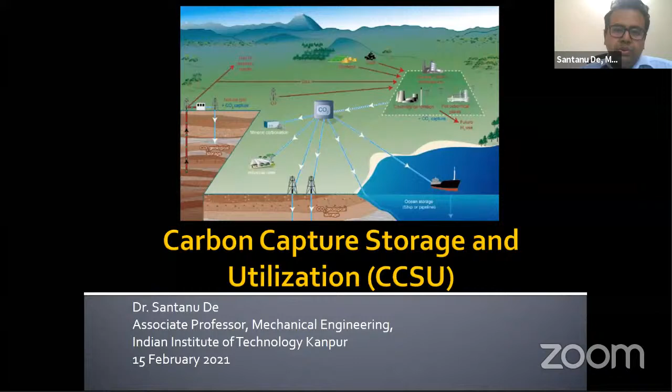If you see my profile, I have not published any journal article on this topic. There are some ongoing works which I can discuss towards the end of this lecture. So just to begin, I will start with my brief background and research interests.

Although the Professor has already mentioned that, some of you can visit my website at IIT Kanpur for more ideas. Basically, I worked on the modeling of turbulent combustion, utilizing various models like RANS and large eddy simulation. We also developed different models for turbulent combustion, like the flamelet model, conditional moment closure method, multiple mapping conditioning, and the transported PDF approach.

If you go from the flamelet to the PDF approach, these are in increasing order of complexity. Of course that's not the topic of this talk, but if anyone is interested you can approach me and we can collaborate or work together. In the past I applied this RANS-based MMC approach, and then LES on different gaseous and spray flames, and burners like piloted stabilized burners, lifted flames, etc.

I also worked on a very interesting project funded by ISRO, on the development of an LES-based model for scramjet combustion - the supersonic combustion of gaseous and liquid fuels. That was also quite a learning experience for me. Here basically the stabilization of the flame when the underlying flow is very much supersonic is very difficult, and we try to predict such complex turbulence-chemistry interactions in supersonic flows.

Some results from my PhD students - I will not go into the details, but we have simulated some burners like lifted jet diffusion flames, etc., and compared our results with experimental models, getting very good agreement. These are the new models which we developed, and we have investigated such flames.

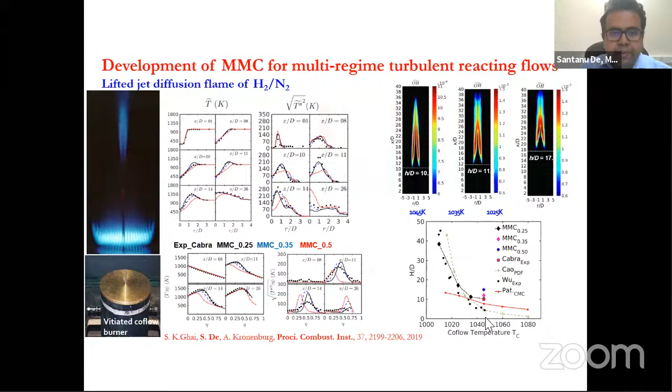This is basically the experimental picture, and whatever we have plotted is our results, with symbols representing experiments. We can see the variation of the lift-off height under different conditions, and a very good trend predicted by our model. This is another example of experimental and numerical validation - I will not go into much detail, but if you're interested we can discuss it later, or you can contact me by email and we'll be happy to share information.

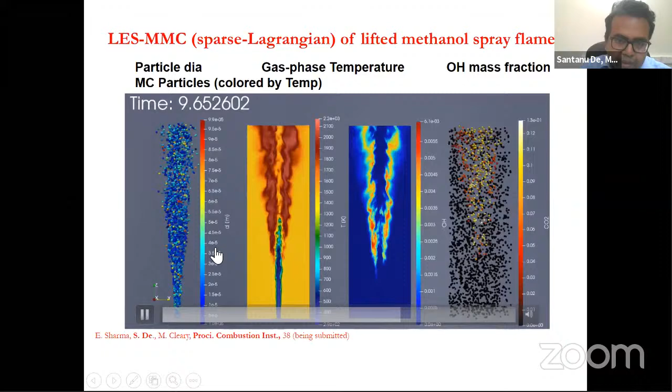Now this is the large eddy simulation - some of you may be working on this, or planning to. We can basically predict very complex flames, and you can see the flame changing instantaneously. This is the instantaneous temperature field, and the flame is basically a lifted flame stabilized away from the burner. Here you have a jet with liquid particles, which are coming along with the flow, and they will evaporate and then participate in combustion.

And this is your OH contour, and you can again see that much of the combustion activity is happening around this location, and so on.

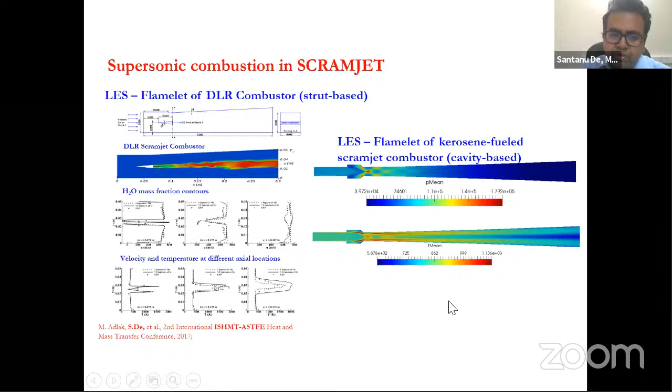This is the DLR scramjet combustor, like a supersonic combustion in scramjet engine. We have done some validations here for the DLR scramjet combustor with our own models, and we got a very good match with experiment. On the left side is the DLR combustor, and on the right hand side we have another combustor where liquid fuel is used. In the DLR combustor, hydrogen is used as fuel, and here we are using kerosene as fuel. In both cases, we've done a validation work.

So this is the coal gasifier, the schematics of the coal gasifier that we have developed. Here we have a gasifier, and coal is being fed, and the bed is fluidized by fluidizing media, which is basically steam or a mixture of steam and air. And on the left hand side we have a riser where this is the combustor.

So why is it called dual fluidized bed? Because these two beds are interconnected, and the bed materials like sand and coal that we are feeding will come from this loop seal, and it will enter the riser. In the riser we burn the fuel, basically the coal, and it generates a high temperature gas that will heat up the bed materials, and these bed materials will be segregated by the cyclone, and then come to the loop seal, and then return to the bubbling bed.

So basically the bed material goes a path like this, and it carries the heat from the riser or combustor to the gasifier, because in the gasifier you are providing steam, and doing gasification reactions which are endothermic in nature. So therefore you need to circulate the heat generated by burning one part of the fuel, and through the bed materials it is done.

Okay, so that is the concept, and this gasifier is suitable for the coal that we have in India, which has a large ash content as high as 45% in those coal samples, and it has a fixed carbon content which is about 40%, and very less volatile matter.

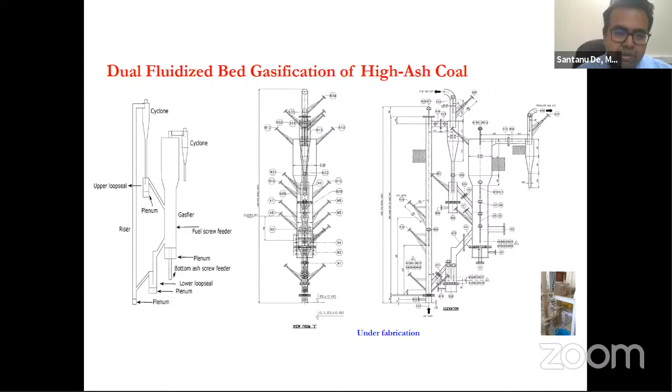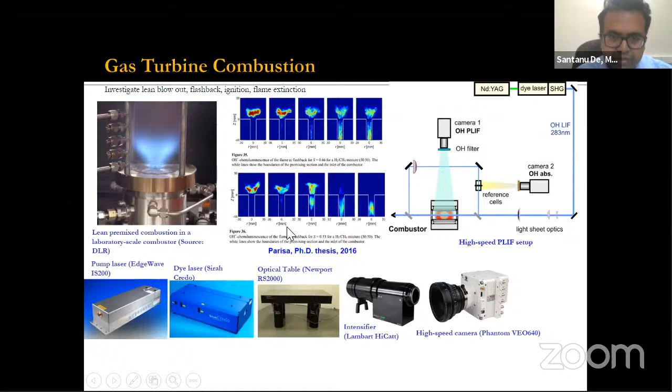Okay, so coming to today's talk, the contents basically covered will be the trends and impact of CO2 emission on Earth, and then the carbon capture technologies that we have. We will briefly talk about the methods for CO2 separation, and then we'll talk about CO2 utilization. So you can note down your answer, or ask during the presentation, or ask me towards the end of this topic.

Okay, so as we know we need energy for sustaining our day-to-day activities, and there are various sources of energy right now that we have. So the message is that all sources of energy will continue to be valid and necessary, and we need to go for a mix of energy. That is the demand of our situation. As of now, we are using fossil fuels, and the share of renewable energy is continually going on the higher side, but still the use of fossil fuel is inevitable, and it will continue to be used. So then what is, how can we mitigate the harmful effect of the fossil fuels?

The problem is that we can try to capture the CO2 and use it for some downstream applications, or we can compress the CO2 and store it underground for long periods in geological reservoirs. We'll discuss some of these things in this presentation. Environmentally, this has to be sustainable—whatever energy source you are using should be environmentally sustainable and adopted across all sources of energy.

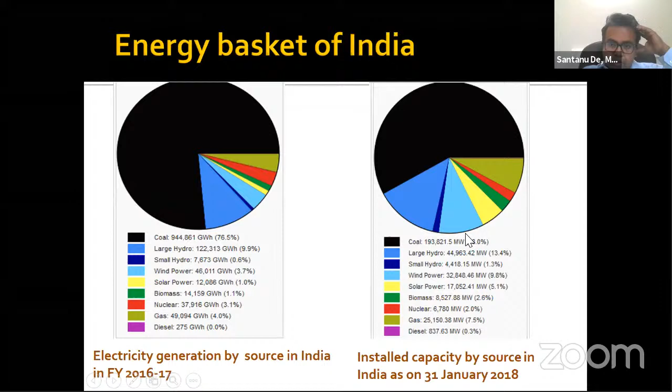Installed capacity by source in India as on 31st January: coal is about 58%. These are basically the electricity generated and the installed capacity figures. You can see large hydro, small hydro, all these things here. The installed capacity is 58% for coal.

Now, carbon capture, sequestration, and utilization. This is probably one of the best solutions to mitigate global warming issues, as per the IPCC's prediction that the rise in temperature should be within 1.5 to 2 degrees centigrade. That is the prediction given by the IPCC, and we need to stay well within this limit. We'll also see the effect of CO2 emission on various ecological things.

There are different sources which are emitting carbon dioxide, and this CO2 has to somehow be captured. From this CO2 that we capture, we can make chemicals and fuels—this is basically called CO2 to X, where X could be fuel, fertilizer, or any other chemical.

Another part is that we need to do carbon mineralization technology—basically mineral carbonates can be produced.

Another thing is that we can store this carbon dioxide in geological storage, basically for enhanced oil recovery. We can pressurize this CO2 and put it under the oil reservoirs, and we can mine oil that was otherwise not mineable. This is another area that can be pursued using the carbon dioxide emitted from different power generation utilities, so we can recover some of the oil.

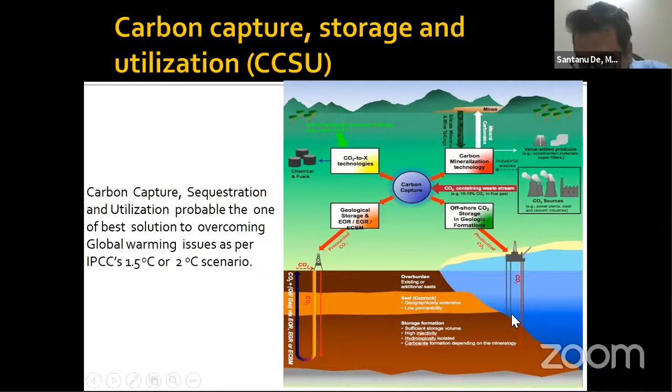Another approach is offshore CO2 storage in geological formations. Basically, on an offshore rig, you drill a well and put the CO2 under the seabed. That is another way to mitigate CO2 emission to the environment.

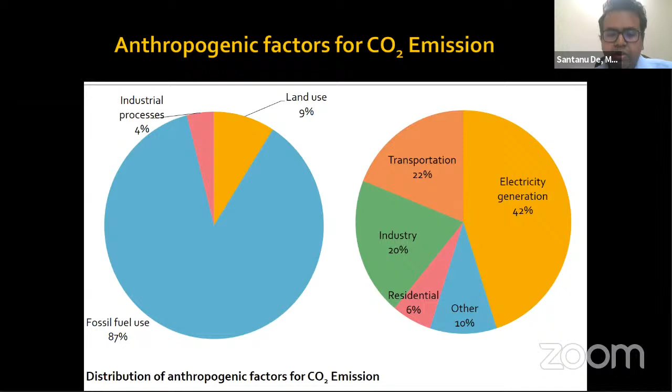Now, the anthropogenic factors for CO2 emissions are outlined here. Use of fossil fuel is about 87%, along with industrial processes and land use. For the transportation sector, there is about 22% CO2 emission. For electricity generation, it is about 42%. Industry is about 20%, residential is 6%, and any other factor is about 10%. This is the typical distribution of CO2 emission from various sectors and industries.

Now, the consequences of CO2 emission—these are basically listed here.

Increased concentration of CO2 in carbon sinks leads to global warming, which can affect the change in food supplies. It can cause extreme weather calamities, and the global average surface temperature rises by more than 1 degree centigrade, along with poor human health and rising sea levels. So these are some of the bad effects of global warming.

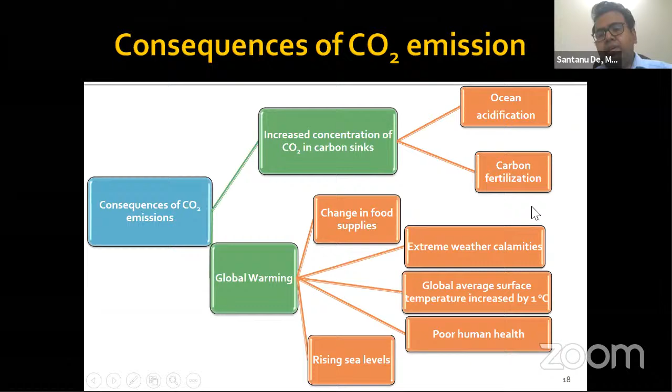Increased concentration of CO2 in carbon sinks can also lead to acidification of the oceans and carbon fertilization. So these are some of the harmful consequences of CO2 emission.

Now, if you look at what we are all hearing in the news and other articles, the glaciers are melting. In fact, a few days back in Uttarakhand, there was a glacier related incident.

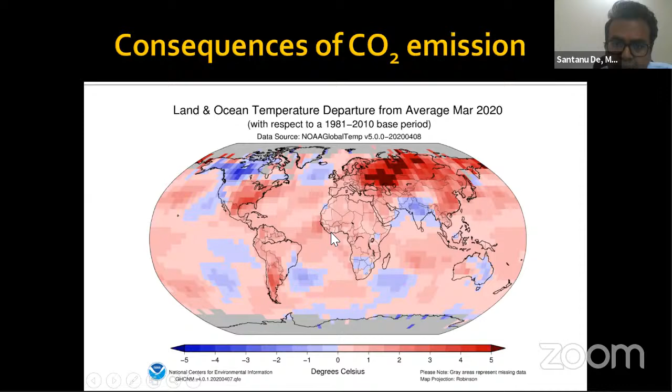Here you can see the annual global surface temperature change for both land and ocean. It is seen that recently there is a steep increase in the annual change in global surface temperature for both land and ocean. So these are some of the data that point out the harmful consequences of CO2.

The average CO2 concentration in the atmosphere is increasing at an alarming rate since the beginning of the industrial age, and in 2016 it reached and went past 400 ppm. Future trends predict that CO2 concentration will continue to rise because of our dependence on fossil fuels as the primary energy source. So now we need to think about renewable energy sources, and at the same time, if we are using fossil fuels, we should try to use them in a better manner, meaning we should use more energy efficient systems and go for hybridization.

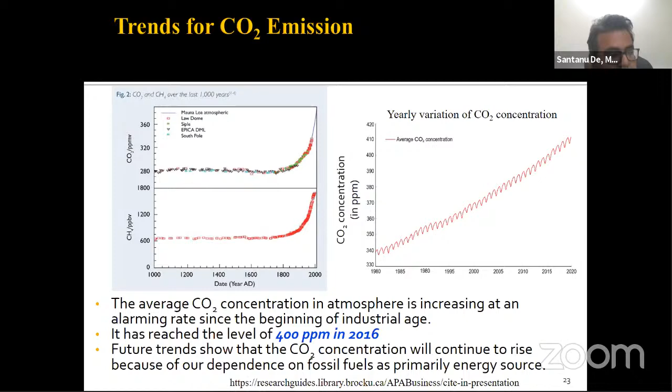So we need to attack this problem in several ways. One is that we need better efficiency power generation systems. We should go for hybridization, and at the same time try to evolve our research towards capturing some of the CO2 being emitted to the atmosphere. We should use some of this CO2 to make fuels and fertilizers, and we can store this CO2 in geological reservoirs. That should be our approach, and I will try to talk about some of these things in this talk.

The average global temperatures have risen 0.75 degrees centigrade in the past 100 years, that is about three quarters of a degree centigrade. Now, can anyone tell how much it will rise in the next 100 years?

Let us see the prediction for rise in temperature. If that happens, it will be a catastrophe for the world, for human civilization, and for all the animals and the ecology.

Therefore we need to be very careful in our consumption, and we should try to go towards better energy systems and mitigate the CO2 emission to a large extent.

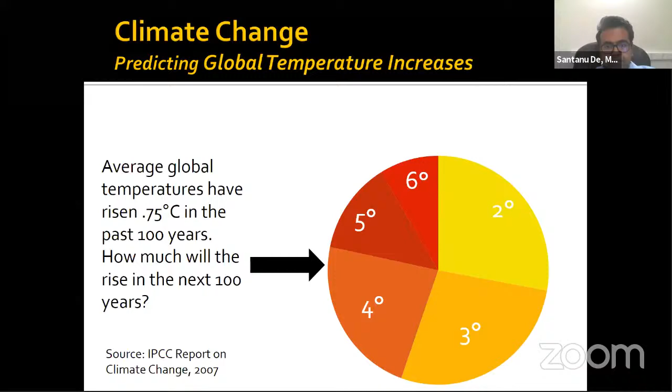The predicted impact, as we have seen, is a temperature rise of about 4 degrees. Now, what will be the impact on us? Let us see.

At 1 degree centigrade, we see severe impacts in marginal Sahel region, and rising crop yields in high latitude developed countries if there is strong carbon fertilization. In water systems, small mountain glaciers will disappear worldwide, with potential threats to water supplies in several areas. At 2 to 3 degrees and 4 to 5 degrees centigrade, further impacts are listed.

There is a rising number of people at risk from hunger, about 25 to 60% increase by the 2080s in one study with weak carbon fertilization, with half the increase in Africa and West Asia. There are significant changes in water availability; one study projects more than 1 billion people will suffer water shortages in the 2080s, many in Africa, while a similar number will gain water. There will be a greater than 30% decrease in runoff in the Mediterranean and Southern Africa.

At about 4 degrees, entire regions experience major declines in crop yields; yields in many developed regions will decline even with strong carbon fertilization. Sea level will rise, threatening many world cities including London, Shanghai, New York, Tokyo, and Hong Kong. These are the predicted impacts if temperature rises about 4 degrees and higher. This is from data on the economics of climate change, from 2006, which is quite old, but gives us some of the ideas.

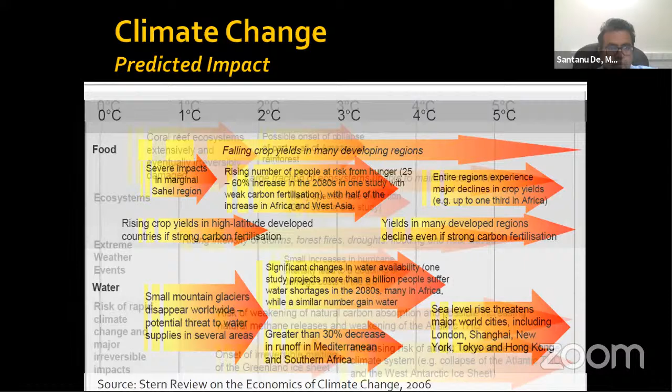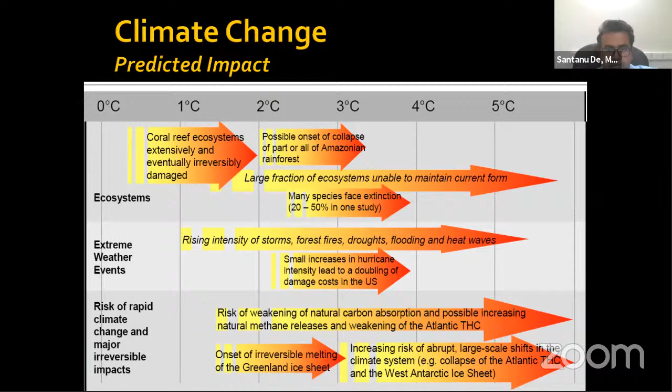What will happen in the ecosystems? Many species will face extinction. There will be extreme weather events: rising intensity of storms, forest fires, droughts, floods, and heat waves. A small increase in hurricane intensity will lead to a doubling of damage costs in the US and in other countries. There is risk of rapid climate change and major irreversible impacts, including weakening of natural carbon absorption, possible increasing natural methane releases, weakening of the Atlantic thermohaline circulation, and onset of irreversible melting of the Greenland ice sheet.

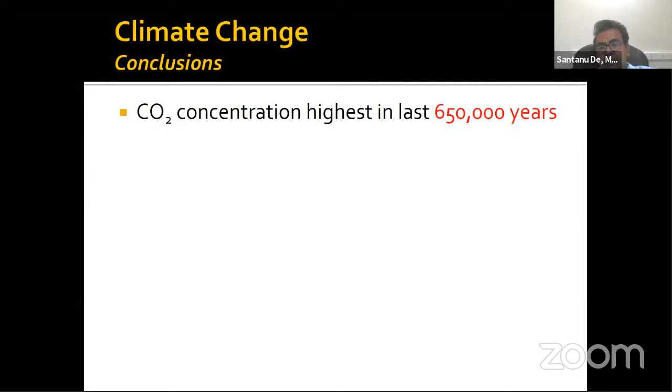The conclusion of the climate change is that CO2 concentration is the highest in many years. Warming of the climate system is unequivocal. Most of the global warming of the past half century is due to the increase in greenhouse gases.

Like so CO2 is a greenhouse gas, and so is methane, right? Global greenhouse gas emissions reduction challenge.

We have to stabilize CO2 concentrations at 450 ppm. Now we are already at about 410 ppm. So in order to have a temperature rise limited to 2 to 2.4 degrees centigrade, we should limit CO2 concentration at 450 ppm, with peak CO2 concentration before 2015, and reduce emissions to 50 to 85% of 2000 emissions. Whatever CO2 is emitted at 2000, we have to reduce CO2 emissions to 50% to 85% of that by 2050. So we have a tall task, and governments across the globe are working towards that.

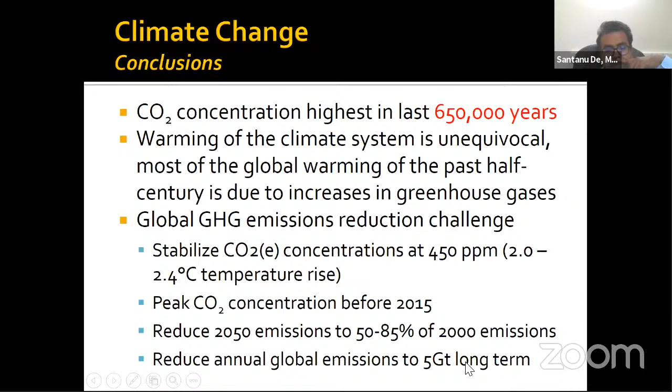Here in India also, we have done a lot to mitigate CO2 emission. We need to reduce annual global emissions to 5 gigaton in the long term. So these are the targets that we have to meet.

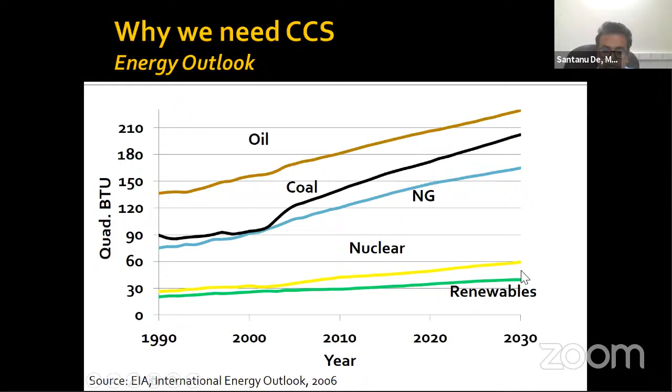The use of coal is still rising, oil is rising, natural gas is rising. Renewables have risen, but it is far less than these other sources.

Then there's conservation and energy efficiency - if we use higher efficiency energy systems, or even LED bulbs which we are all using now, we have to find better energy systems and conserve electricity by going for high electrical rating equipment and devices. Then we can again save a lot of CO2 emissions. So these are the ways we can mitigate CO2 emission to the atmosphere.

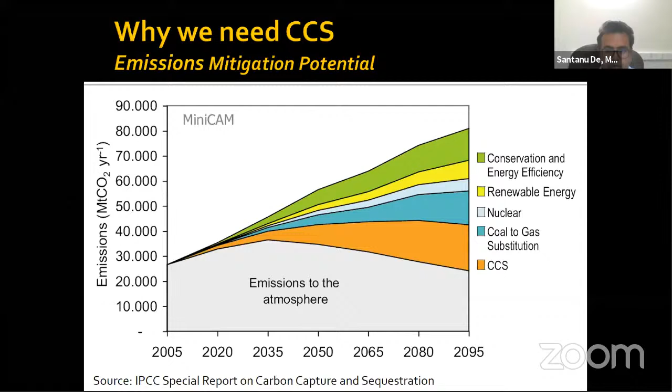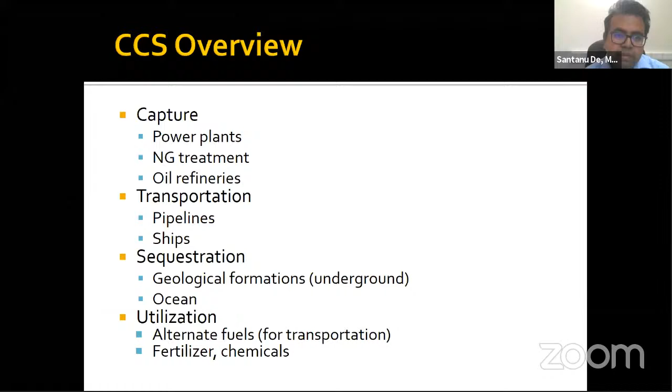Now, what are the growth drivers? The burgeoning demand for CO2 for enhanced oil recovery techniques - as I said, some US-based companies, or even in Norway, some companies are getting this CO2 and putting it under the oil well for enhanced oil recovery. They're using the North Sea in Europe. In the North Sea, I think Norway has developed a rig where they are basically doing this CO2-based enhanced oil recovery.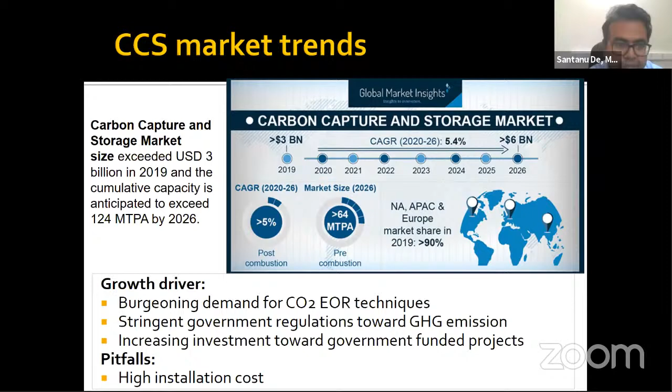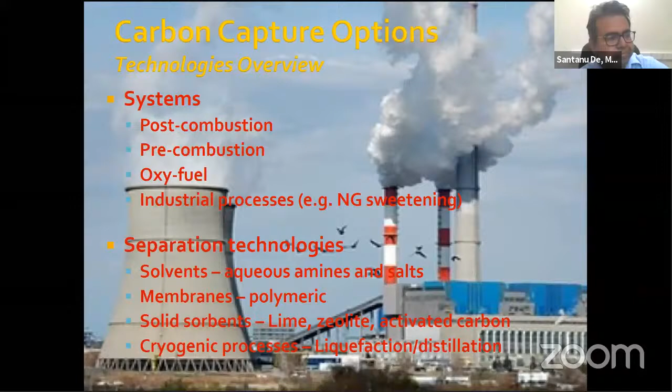So post-combustion capture is where you basically use the fossil fuel, which could be coal, gas, or even biomass, which is a renewable fuel. You burn this in air to produce heat, and then run a turbine to produce power. The flue gases then need to have nitrogen and oxygen separated, since most of the time we give surplus oxygen in the boiler, and then you can separate CO2.

Air has 79% nitrogen by volume, so you need to remove a large amount of nitrogen and some oxygen from the flue gas, which is not an easy task. There are techniques that can be employed to remove CO2, but the problem is that those separation reactors become very bulky because you have to deal with a large volume of flue gas.

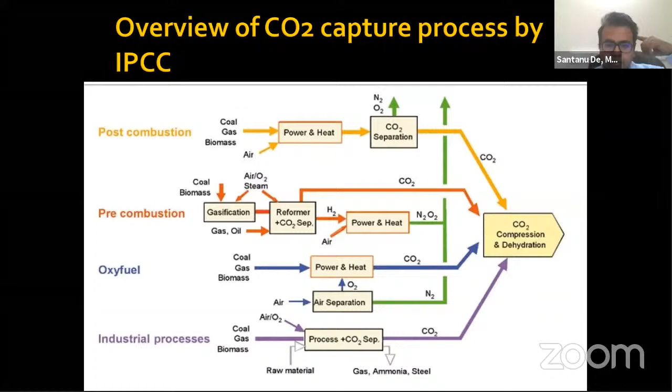This is a schematic diagram of post-combustion capture, where fuel and air are used to burn, and the heat generated is used to produce power, and you have to separate the carbon dioxide from the other gases. So this is post-combustion capture.

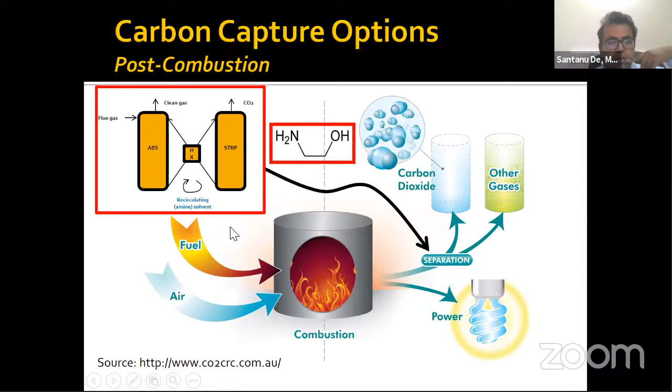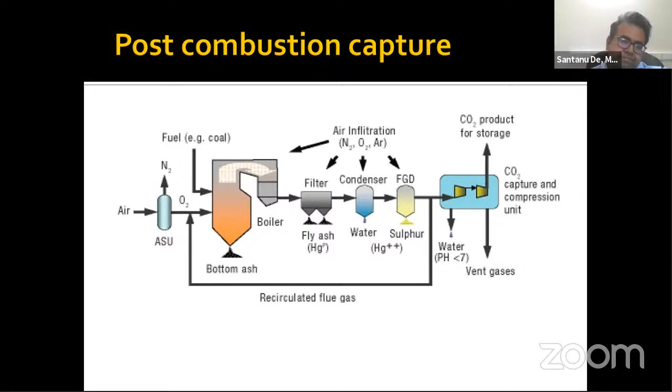Yes, so we all know about this pulverized coal plant, right? Here you are capturing the CO2 after combustion, so this is post-combustion CO2 capture. We have the pulverized coal boiler where you supply coal and air, and then you have the ESPs and the FGDs, etc. After that, the CO2 capture system is placed where you separate the CO2 based on amine-based separation, as I discussed previously.

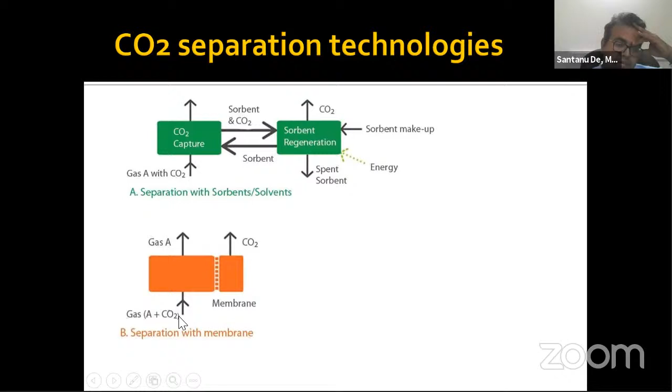Another CO2 separation technology is based on membranes. Here we have a gas with CO2, and based on the membrane, it can separate CO2, and you get the flue gas, basically the other parts. So this is the membrane based separation technology.

Solvent-based approaches have been demonstrated quite well over the last couple of decades, and membrane-based separation technology is also coming up. There's a lot of research going on across the world, and this is a promising technology not only to separate CO2, but it can also be useful to separate oxygen from air.

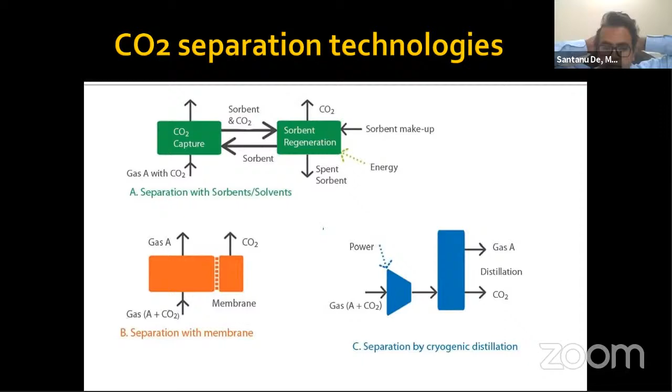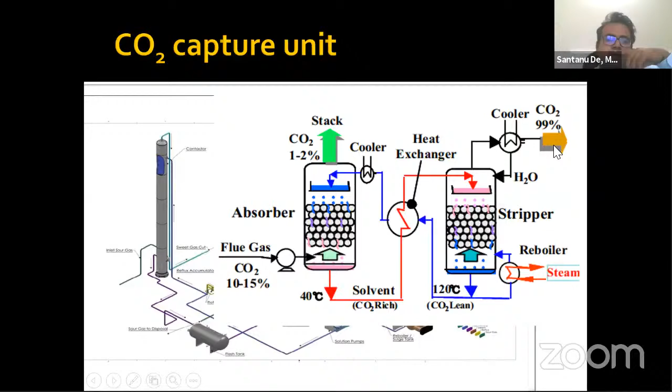The capture cost of CO2 is about 80% of the CCS cost, and the rest 20% accounts for compression, transportation, and sequestration. The solvent regeneration cost accounts for about 60% of the capture cost, so you can see that it is quite high.

The cost of electricity can increase by 70 to 80% based on that MEA. MEA is one of the amines, and based on the MEA, research has shown that electricity cost will rise by 70 to 80% if you want to capture CO2.

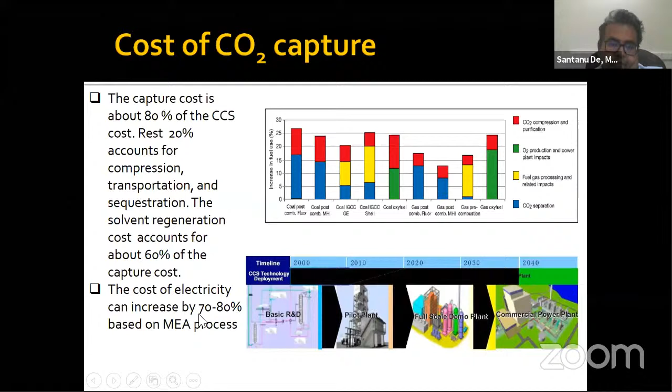Now, CO2 capture technology selection. How do you select the technology? Drivers for process selection include the temperature of the feed gas, presence of oxygen, presence of contaminants like H2S, ammonia, COS, sulfur dioxide, etc. It should be commercially viable, cost effective, and able to be assimilated into existing process configurations.

So we have a power plant, and now if we can retrofit, or develop another system to capture this CO2, that will be good. All these things need to be considered before arriving at a technology.

So possible technology routes could be, as I mentioned, gas separation membranes, absorption membranes, physical absorption, cryogenic separation, adsorption, and chemical or amine based absorption. These are the CO2 capture technologies.

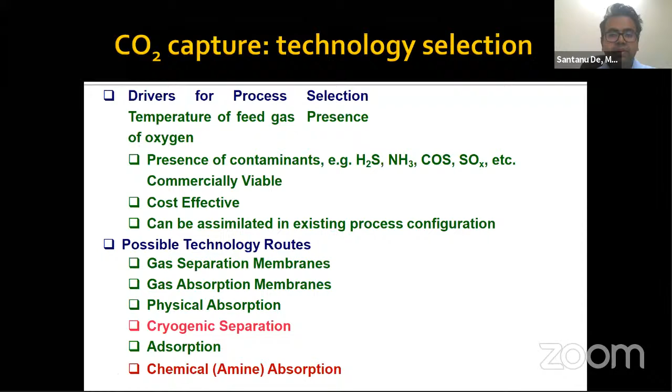Chemical absorption process is extensively used for CO2 removal from flue gas and industrial gases, with a wide choice of amines commercially available, for example MEA, DEA, etc. Some blended amines are also available.

It's a thermodynamically non-ideal system due to electrolytic dissociation of CO2, amine, and water, with poor stage efficiencies in the contactors due to heat of absorption. For effective modeling and engineering design of amine contactors, one needs to look at the thermodynamic interactions.

I will not go into much detail on this, but this is an overview I'm trying to give. These are different kinds of amines that can be used, like monoethanolamine, diglycolamine, diethanolamine, etc. I'm not an expert on this topic, so I won't be able to tell you much more about it.

Now, cost of post-combustion CO2 capture, based on a study done by one US-based agency. You can see the overnight capital cost for different things - one is the ultra supercritical coal power plant, and another is the ultra supercritical coal with 90% CCS. You can see that the capital cost has increased.

Now per megawatt, you can see the capital cost has increased. But if you compare this capital cost with onshore wind and solar PV, it is very high at this moment, because the plant capital cost itself is also very large.

Now, fixed operation and maintenance cost is about 42,100, and here it is 80,530 per megawatt year, which again is much higher than the solar PV and onshore wind applications.

So the total here you can see the CO2 transport and storage cost is basically 9.13 megawatt hour, and that levelized cost has gone up from $92.46 to $151.34. So that means per megawatt hour the cost has increased.

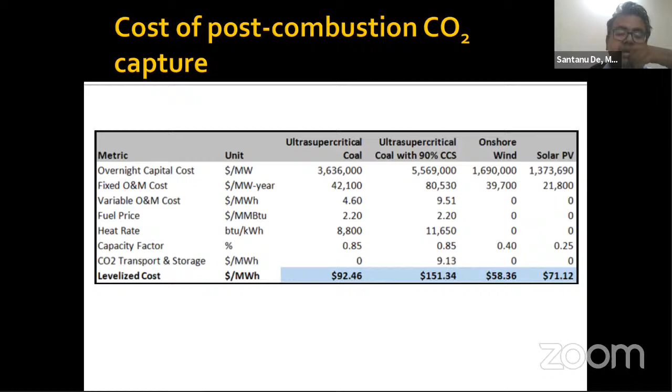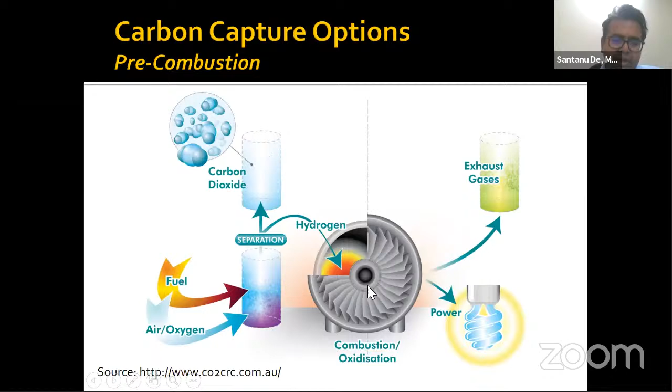I'll skip some of these slides in the interest of time. I already described the oxy-fuel combustion process, so I'll skip this too. The pre-combustion capture I already mentioned some of - it involves the sequestration of CO2 from fossil fuel prior to completion of combustion. So you do not burn the fuel, rather you gasify it, and whatever gases are produced, that is the syngas, before it is burnt, you capture the CO2.

Here is a schematic where you have the gasifier, where you are supplying the fuel and steam, and you may supply oxygen also. Then the syngas will not have any nitrogen dilution because you are not giving air. If you are using a dual fluidized bed gasifier, you can gasify coal in a pure steam media, without needing oxygen or air. But in some gasifiers, to sustain them, you need to produce some heat, because the gasification reactions are endothermic - therefore you need to supply some external heat.

In the dual fluid bed system I initially discussed, heat is circulated via bed materials. But if it's only a single reactor, like a bubbling fluid bed or circulating fluid bed reactor, you need to burn part of the fuel inside the reactor, and if you're using air, your gasification product will have nitrogen - again the same problem of separating large amounts of nitrogen from the syngas. Therefore the dual fluidized bed system is better, because in one reactor I'm gasifying the fuel in presence of steam, and in another reactor I'm burning the coal in presence of air, transferring the heat from one reactor to another. That's the advantage of the dual fluidized bed system, and this syngas will be free of nitrogen.

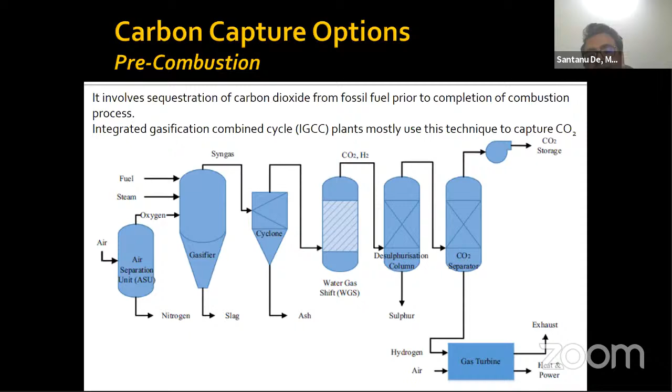After that you can remove the particles, that is the ash, from the cyclone, and then the rest of the gases can be fed to the water gas shift reactor, where you're producing carbon dioxide and hydrogen. Then you have the desulfurization column where you separate sulfur, and then you can capture the CO2 and store it, and the rest of the gases is hydrogen, which can go to the gas turbine. So that is the pre-combustion capture, and by designing the gasifier to prevent nitrogen dilution, you do not need to separate nitrogen - that will be quite good actually.

This is another layout of the pre-combustion capture, where you have the raw syngas produced by gasification, which can be cleaned, and after cleaning, you send the clean syngas to the combustor of a gas turbine, where ambient air is compressed and you burn the fuel to produce high temperature gas. Then you have the turbine to produce electricity, and the heat recovery steam generator which produces steam for a Rankine cycle. So it's a combined cycle plant, like the IGCC plant I was discussing, and you can also separate CO2 from this plant and store it.

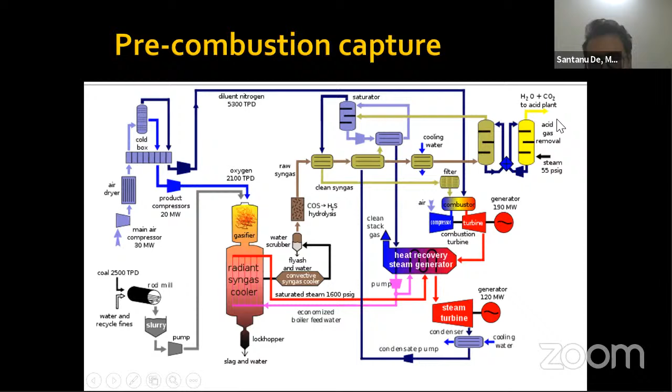Pre-combustion capture comes with advantages, because it generates hydrogen or synthesis gas as an alternative fuel. You can use coal and biomass to produce hydrogen or synthetic gas. It also allows a compact system design due to lower gas volume, higher pressure, and higher carbon dioxide concentration.

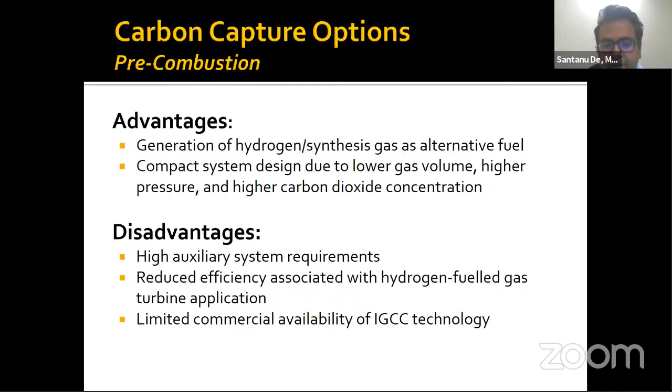But there are problems too. It requires high auxiliary systems, and there is reduced efficiency due to hydrogen fuel gas turbine application. There is also limited commercial availability of IGCC technology, so it is not commercially available yet. In our country, BHEL has developed IGCC and also developed a gasifier, but it is not commercially available. This requires more emphasis on research, and after that I think it will be suitable for commercial applications.

In pre-combustion capture, there are various technologies to separate CO2. One is called the Sulfinol method, where different chemicals are used. Another is the Selexol method and the Rectisol method. These are different ways of capturing CO2 from pre-combustion capture, before you burn the fuel, you have to capture this CO2.

Physical absorption is becoming increasingly popular as a gas treating solvent, especially for coal gasification applications. Physical solvents tend to be favored over chemical solvents when the concentration of acid gases or other impurities is very high. In addition, physical solvents can usually be stripped of impurities by reducing the pressure without the addition of heat. I will skip some of these slides in the interest of time.

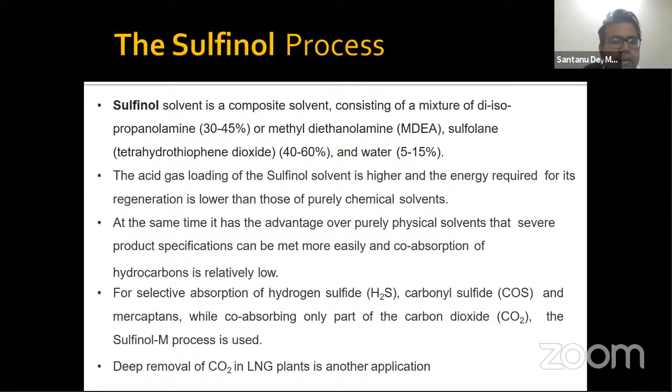Now let's move to the next discussion, which is CO2 capture from industries. There are different industries emitting a lot of CO2, and here is data from 2017 showing how much CO2 is emitted from each of these industries. For example, iron and steel emits about 3.1 gigaton of CO2 per annum, and it uses only 4% energy from renewable sources.

Chemicals and petrochemicals have a renewable energy share of only 3%, and emitted 1.7 gigaton of CO2. Cement and lime used 6% renewables, and emitted 2.5 gigaton of CO2. So these are the three heavy industries.

On the other side, if you look at road freight, aviation, and shipping, there is a very small or negligible amount of renewable share, and they also emitted CO2, about 2.3 gigaton for road freight, or 0.9 gigaton for aviation and shipping industries. In the long run, road freight, aviation, etc. is bound to increase, so we need to focus on CO2 capture from these industries or use renewable energy in them.

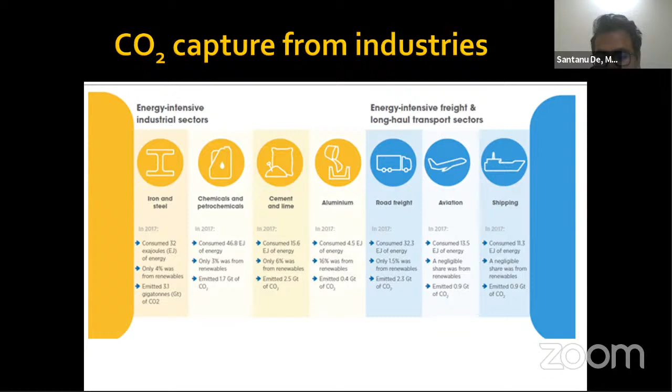Similarly, the construction sector requires iron and steel, and the emission from iron and steel is quite high. We should pay attention to these sectors to either operate them through renewable energy or reduce the CO2 emission, and it is possible to do that.

I will give you a case study here of CO2 capture from the cement industry. Here you can see the raw materials, energy, and resources in the quarry, then the crusher, which transports material to the raw mill, and then there is a kiln, preheater, and pre-calcinator.

Then you have the cooler, and after that the cement mill, where you crush the cement and store it, and then logistics where you transport the cement from one place to another. Now here you can see the contribution from each of these processes, how much energy is needed and how much CO2 is emitted.

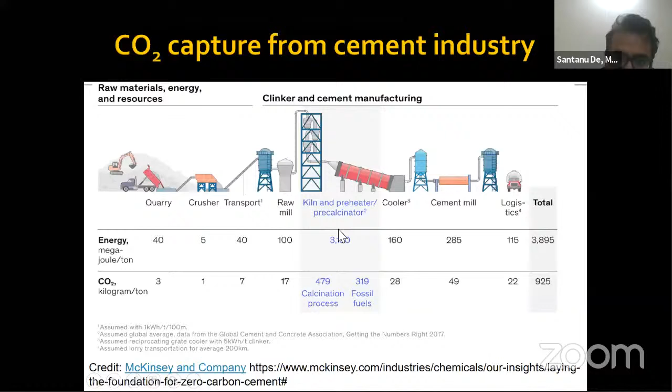You can see these are small numbers in comparison to this one. In the kiln, preheater, and pre-calcinator, you are using 3,150 megajoules per ton of energy, and emitting this much kilogram of CO2 per ton. If we can try to make it renewable, or capture the CO2, I think it will mitigate a lot of CO2, and this is possible.

I do not have another slide to describe how it can be done, but I can discuss it orally. In a cement industry, we have calcium carbonate, that is limestone, and this limestone decomposes into calcium oxide and releases CO2. It is possible to capture this CO2, but the only problem is that in the kiln we are using air.

Air is used to burn some fossil fuel, producing very high energy where calcium carbonate decomposes. Now instead of air, if we use oxygen from an air separation unit, this oxygen can be diluted with flue gas and used in the kiln, and the calcium carbonate will decompose into CO2. Therefore, it will produce a pure stream of CO2 which can be cleaned from any contaminant, with no other gases like nitrogen present, making it possible to capture CO2 from this gas very easily.

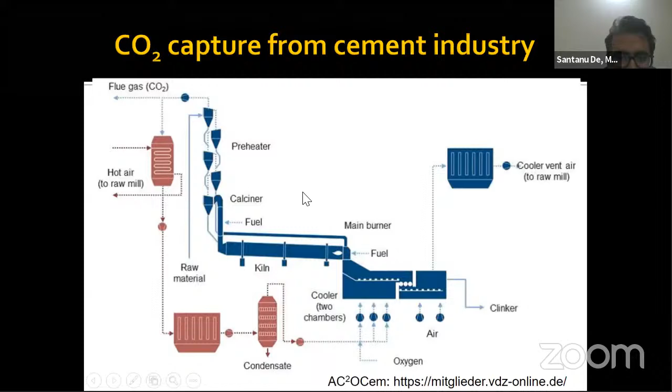I think there has to be research in that direction. Some European countries are doing research in this area. I've seen some papers in that direction they are working on, and it is possible to produce methanol from this CO2 captured from the cement industry. This is another layout demonstrating that; I'll skip it. Now, decarbonization of iron and steel industries.

It may also be possible to decarbonize iron and steel industries. In fact, Tata Steel is doing research where they are developing a gasifier where biomass will be used to produce syngas, and based on this syngas they will operate the blast furnace. In the current conventional blast furnace, they mix fossil fuel and burn it in presence of air. Again, from the flue gas coming from the blast furnace, it may be possible to capture CO2. That CO2-rich gas can be separated using techniques discussed earlier, and it may be possible to use it for sequestration or utilization.

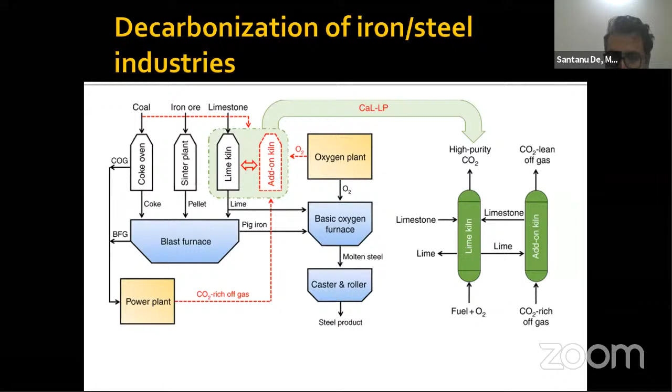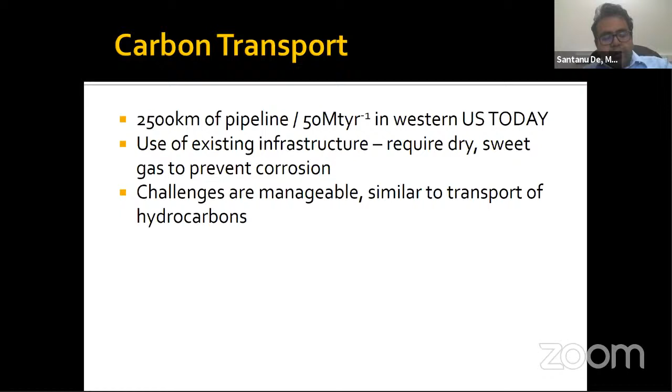Now, carbon transport, basically CO2 transport. In the US, I think there are 2,500 kilometers of pipeline in Western US, and use of existing infrastructure requires dry and sweet gas to prevent corrosion. That is one thing we have to keep in mind. Challenges are manageable, similar to transport of hydrocarbons. So we can have a CO2 pipeline, and bring the CO2 to the location where it can be sent into the geological reservoir.

The big picture is storage in oil reservoirs, for depleted and enhanced oil recovery. Natural formations and ocean storage can store a lot of CO2. The question is, will it leak? It may not leak; models suggest 99% containment. So once it is sent into the geological reservoir, it will diffuse into the pores of the rocks and remain there.

Existing reservoir data can be used to estimate storage potential and address water concerns, with no groundwater contamination. Geologists are working in this direction, doing a lot of experiments to see how much containment is possible, and based on imaging etc., they're predicting whether it will contaminate the groundwater. So some work they are doing.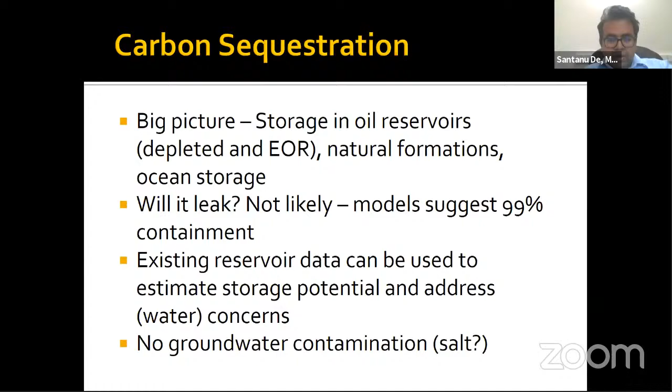Now CO2 utilization, this is the last aspect, and here I am going to cover how we can utilize the CO2. Before that, hydrogen is one of the renewable energy carriers, and in this budget the finance minister has discussed the hydrogen economy, and I think she has declared there will be some initiative from the government on this. Hydrogen is a fuel and can be used as a fuel, but it is not readily available. Like natural gas is mineable, coal is mineable, but hydrogen gas is not available. So hydrogen is basically a carrier.

So what we do is we can produce hydrogen from various other resources. We can use biomass, gasify it, and produce hydrogen, and we can capture CO2 and store it. Similarly, we can gasify coal and from that we can produce hydrogen.

We can use natural gas, and from the natural gas, by reforming, we can produce hydrogen, and CO2 we can capture. So we can produce hydrogen from various sources. But if we emit this CO2 to atmosphere, then it is not useful actually, right? Then it is as good as using coal, right?

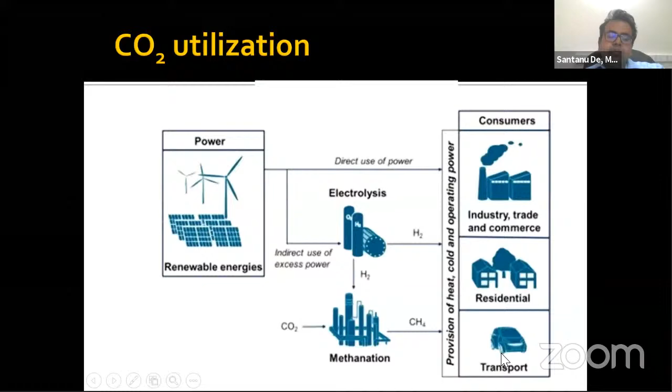So you can basically capture this CO2 and store this hydrogen. You do not need very high pressure storage for the hydrogen - rather, you can use this hydrogen to produce methane. And now this methane can be stored, or you can make methanol, which will be a liquid fuel, and you can store it. And that can be used for different sectors like residential, transport, and industry. So this is one of the ways of CO2 utilization.

And in this study, there are different ways to produce methanol, like CO2 hydrogenation. So one is methanol production. Then you can also produce ethanol from CO2 hydrogenation. CO2 hydrogenation means that you are mixing CO2 and hydrogen in a reactor, under the presence of some pressure, temperature, and catalyst, and you can produce various fuels like methanol, ethanol, dimethyl ether, formic acid, etc.

And you can see the value added profit - so this is the profit, not the cost. So for methanol, if you use CO2 and do CO2 hydrogenation, you can produce methanol and the profit will be 2.8 to 5.9 cents per kg. If you make DME, the profit is 69.6 cents per kg. If you make ethanol, that is 33.1 cents per kg.

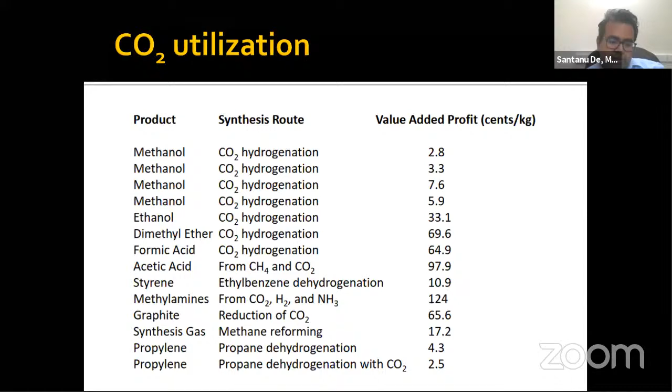So therefore, it is quite possible to use this CO2 that you are capturing to form fuels and chemicals, and it is going to be economically viable, because you are using renewable energy, renewable hydrogen, and you are capturing the CO2 and storing the energy in chemical form. And then this methanol, DME, ethanol, etc. can be used for any downstream applications for the production of power, etc. So I will present a case study which is being done by one of my MS students currently.

So here, this study is about the production of methanol - methanol synthesis, and this is the equilibrium study where we have considered different methanation reactions.

One reaction is CO2 plus 3H2 going to CH3OH plus H2O. We have done the equilibrium analysis at different temperatures and pressures, and we can see that with pressure, the CO2 conversion rises, and if we increase the temperature, the CO2 conversion decreases for this reaction.

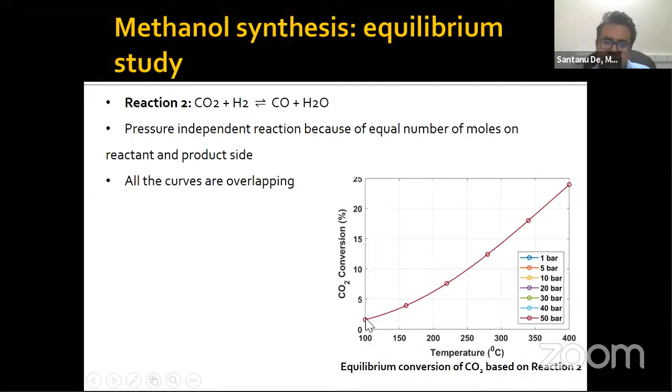When we mix CO2 and H2, there are many reactions going on, and this is one of them. The next reaction is CO2 plus H2 going to CO plus H2O. Here you see that the CO2 conversion increases with temperature.

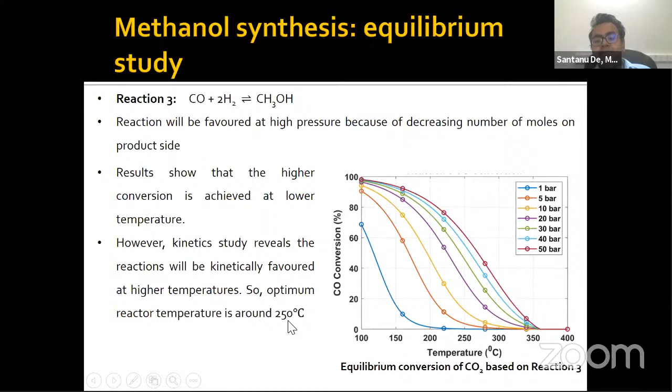If you look at the third reaction, CO plus 2H2 going to CH3OH, here you see that with pressure the CO conversion increases, and with temperature it again decreases. So it is possible to do this equilibrium study analysis, and based on that, arrive at the final reactor temperature. In this case, the optimized reactor temperature is about 250 degrees centigrade, obtained from the equilibrium study.

This is the schematic diagram of a methanol synthesis unit producing 80 million ton of methanol annually. We are using a mixing chamber where CO2 and hydrogen are mixed, and this is the hydrogenation reactor where we send the mixture through a fixed bed of catalyst. After that, the gases come out and go to the heat exchanger, where they get cooled while heating up the incoming gases. After that, these gases go to heat exchanger 2.

This is a study we are currently doing for generation of methanol. After flash vessel 2, whatever gases remain have to be cooled down, and then they go to the distillation unit, where we can separate out the methanol and water. In this way we can produce methanol.

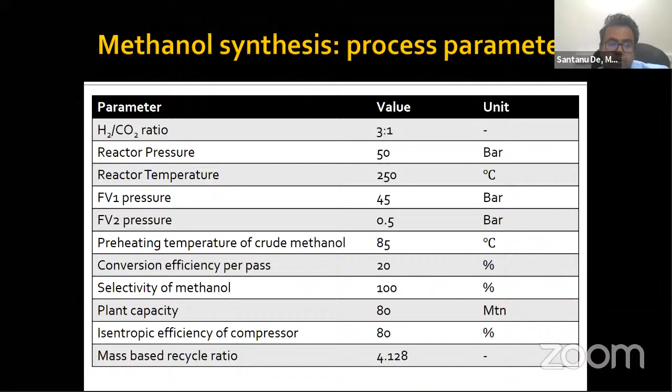These are the process parameters we took, and then we calculated and did the energy analysis. The input feed heating at HE1, heat exchanger 1, is about 8.5 megawatt. Crude methanol preheating, which is HE2, is 4.5 megawatt. Distillation unit reboiler, which is HE3, is 4.8 megawatt.

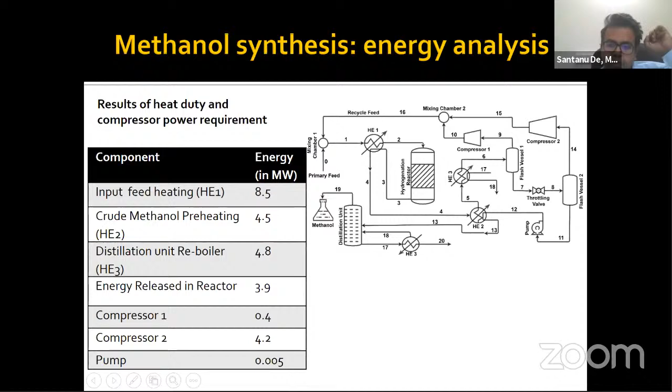Energy released in the reactor is 3.9 megawatt. Compressor 1 requires 0.4 megawatt, and compressor 2 requires 4.2 megawatt. The pump work is 0.005 megawatt, that's 5 kilowatt, not much. So this is the result of the energy analysis, and here are further results.

So we are producing hydrogen, which has a lower heating value of 120 megajoules per kg, and the flow rate of hydrogen is 0.48 kg per second. The flow rate of methanol being generated is 2.53 kg per second, with a lower heating value of 20.1 megajoules per kg.

Now the work done in compressor 1 and 2 is this much, and the pump work is this much, so the total work done is this much. Based on the lower heating value, one can find the efficiency of the system, and the efficiency is 81.75%.

How did you find it? You multiply 0.48 into 120 for the hydrogen input, and add the other input work together. The output is 2.53 kg per second of methanol with its LHV, so you calculate the energy available with the methanol, take the ratio, and you get 81.75%. That is the efficiency of the methanol synthesis.

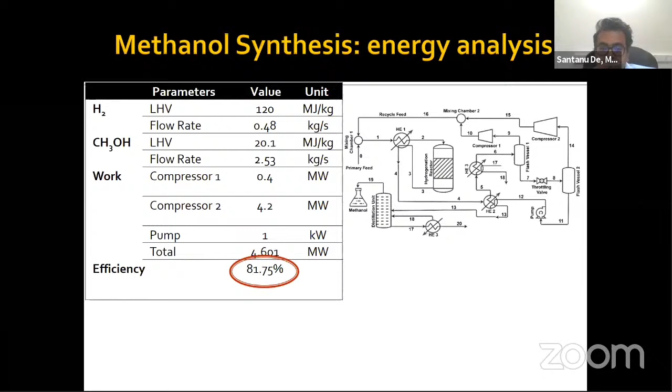Comparison of system performance: one can do analysis based on one flash vessel versus two flash vessels. In the diagram I have shown two flash vessels, and using only one flash vessel causes a lot of penalty. With one flash vessel, hydrogen compression is about 13 megawatts, CO2 compression is 4.2 megawatts, and total work is about 17.1 megawatts.

If you use two flash vessels like we have done, it reduces the compressor work significantly, because hydrogen compression cost decreases to 0.4 megawatt, and CO2 compression is 4.2, totaling 4.6. So in the two flash vessel system, hydrogen is separated at high pressure, and about 73% of work is saved in compression. The two flash vessel system also reduces the system investment cost.

This is necessary to optimize the system. Based on this exergy destruction, you can find where you are losing the maximum exergy, and then optimize the system based on your requirement.

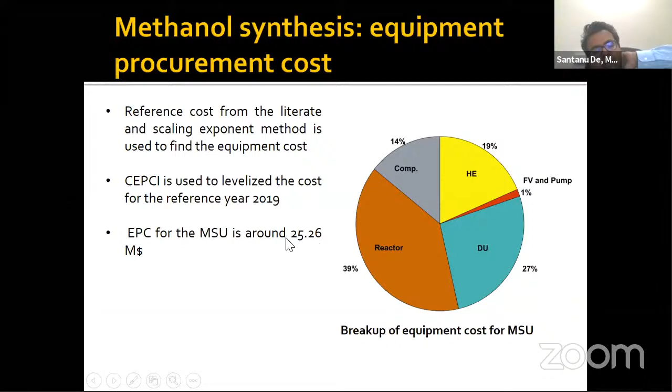Now the equipment procurement cost is shown here: compressor is 14%, reactor is 39%, distillation unit is 27%, heat exchanger is 19%, and pump etc. is about 1%. So EPC for the methanol synthesis unit is around $25.26 million.

Various cost components of our total capital investment are calculated as a percentage of EPC. The total capital investment for this plant is about 53% for on-site cost, 10% for other cost, 23% indirect cost, and 14% offsite cost. The plant consists of 3 units: MSU, absorption plant, and the electrolyzer unit. Electricity for the compressor, electrolysis and plant electrolysis is based on renewable sources, and the total capital investment for the project is about $152.64 million.

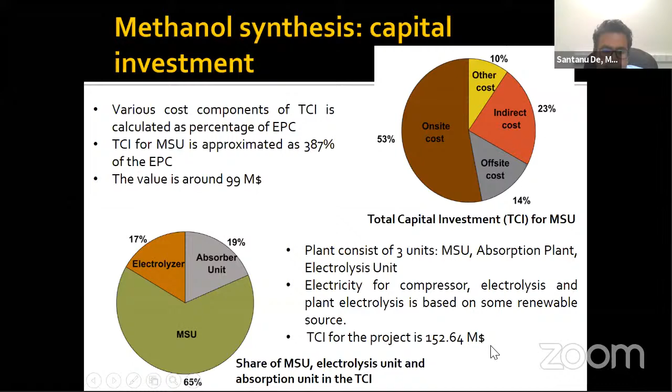Based on that, we have estimated the cost, and the cost of methanol for the system we have designed is about $353 per kiloliter, which roughly comes to about 26 rupees per liter, and the market rate is this much. So this is one of the analyses we have done recently.

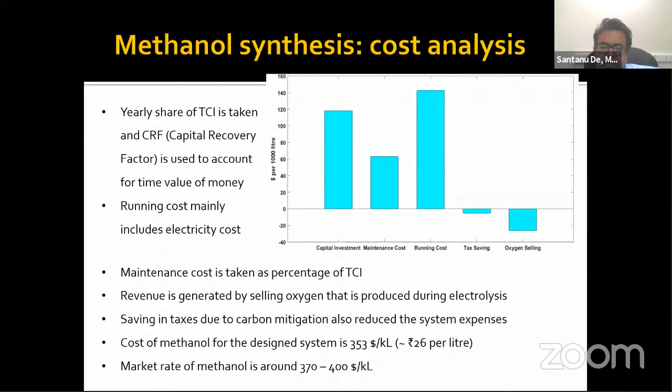It is yet to be published, and we have communicated a paper on this. So with this, I will come to the conclusion of my presentation, and thank you very much. I'll be happy to answer any questions.